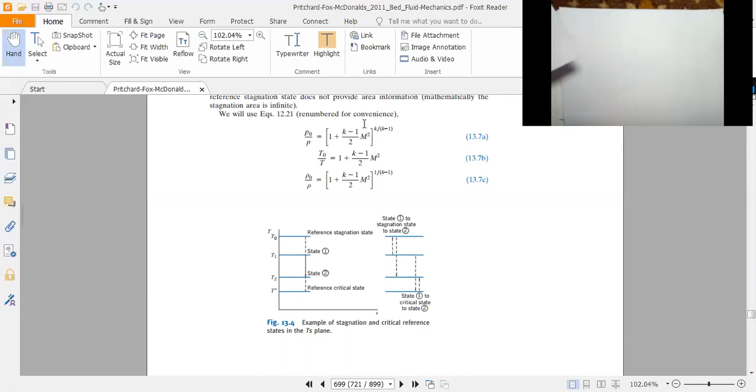Other conditions, p naught over p star, T naught over T star, rho naught over rho star, and V star relations, they were basically derived. Well, now we are going next. Now with the use of those equations, we will find out the required result. What are the equations? Rho AV is equal to constant is equal to rho star A star V star.

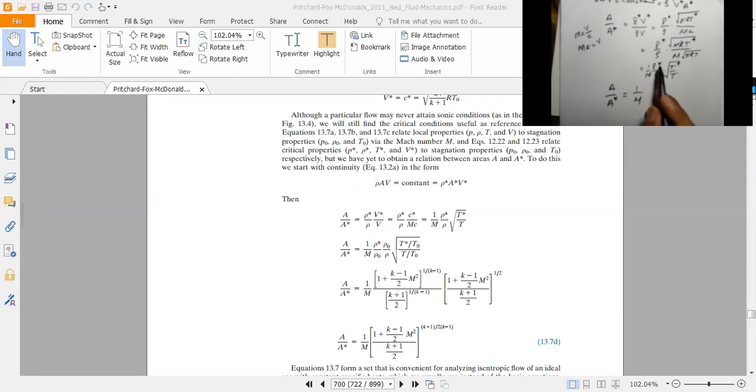Well, after this result we have another equation, that A over A star is equal to 1 over M. Basically we are dividing and multiplying on both sides. Rho star over rho naught dot rho naught over rho, we have multiplied and divided by rho naught, and similarly here we have divided and multiplied by T naught. Now we have values of these terms.

Basically I will write it here. Now we will use these values: P naught over P, T naught over T, rho naught over rho. Similarly, P naught over P star, T naught over T star, rho naught over rho star values. So using these values, we have 1 over M. Actually, we have value of rho naught over rho star, but here we have rho star over rho naught, the reciprocal. So we will write it as 1 over its value, k plus 1 over 2 whole power 1 over k minus 1.

Next we have rho naught over rho, with value 1 plus k minus 1 over 2 Mach number square whole power 1 over k minus 1. Similarly, we have value of T naught over T star, but here we have T star over T naught. Then we will write on opposite side k plus 1 over 2 whole power 1 over 2 because of this square root, and T over T naught in denominator, but we have value of T naught over T, so we will write it on opposite side, 1 plus k minus 1 over 2 Mach square whole power.

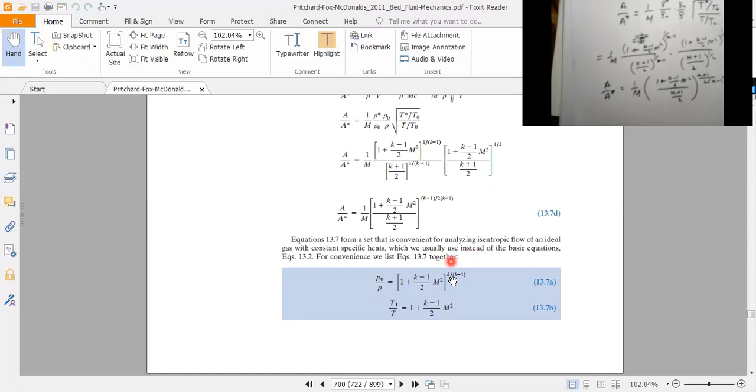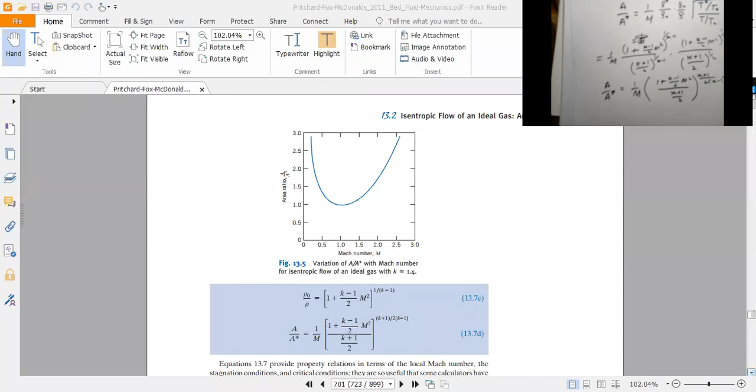This equation provides the property relation in terms of local Mach number to the stagnation conditions and critical conditions. Stagnation and critical conditions, we have found out the relation. They are also useful in that some calculators have some of them built in.

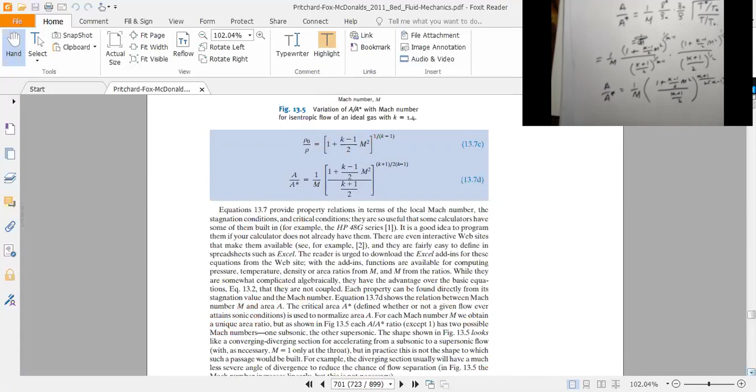Appendix E.1 lists flow functions for property ratios in terms of Mach number for ideal gases. The table of values as well as a plot of these property ratios is presented for air for a limited range of Mach numbers. The associated Excel workbook, Isentropic Relations, can be used to print.

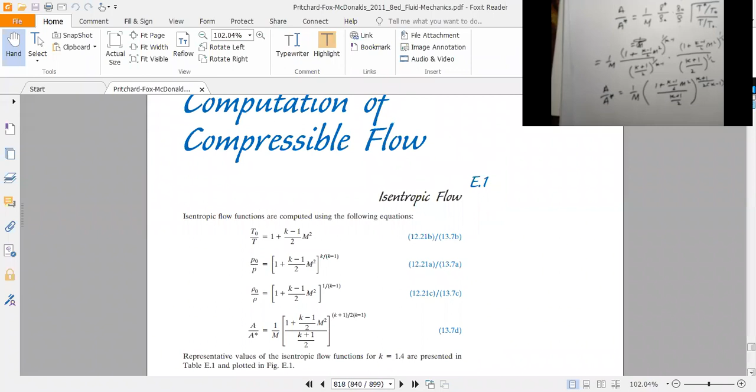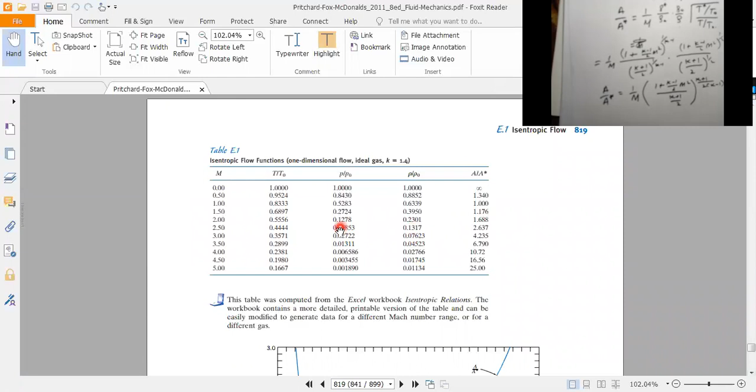As we increase our Mach number, we have these different changes that may be described in the form of this graph: with increasing Mach number, area decreases till Mach number approaches 1 and then further increases. But all other properties, which were 1 initially for Mach number 0, are going to decrease continuously as we increase our Mach number. Okay.

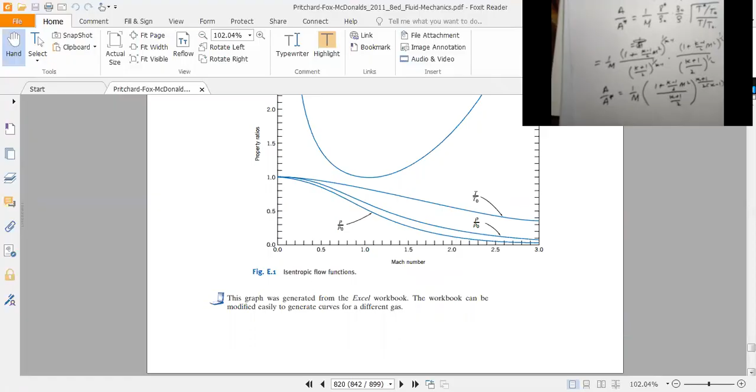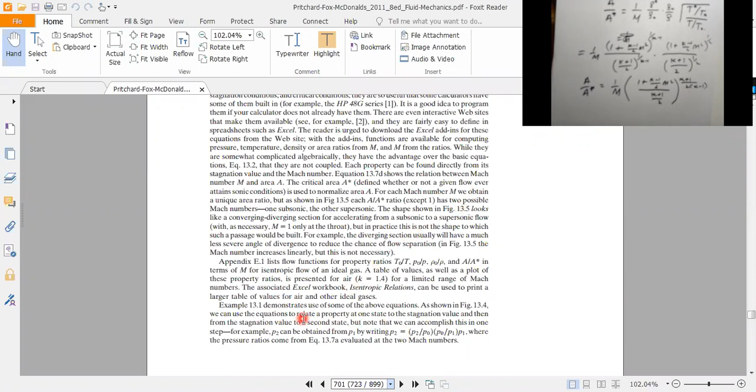We also discussed what will happen with the increase of Mach number, but that was a specific case for air, for which the value of k is equal to 1.4. For other mediums that table may differ. Example 13.1 demonstrates some of the above equations as shown in 13.4. Here we have an example which we will discuss in our next video.